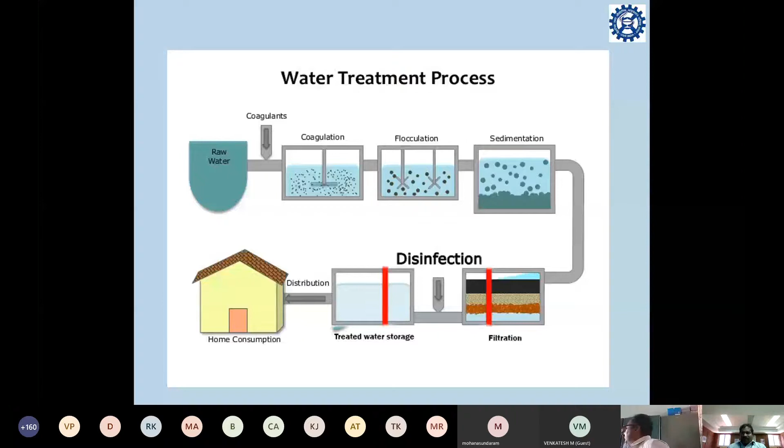So in case of water treatment processes, what are the applications of membrane based processes? I will talk about membrane in later slides, but first we have to look at the applications of membrane processes.

The first one is desalination of seawater. Seawater contains a high amount of salts, so we have to treat it for drinking purposes.

The second one is treating brackish groundwater. Groundwater also has some dissolved salts and dissolved ions in it, so we have to treat that water before drinking.

And then water softening. In some places we can see hard water, which is nothing but water that has mostly calcium and magnesium ions, so this water has to be softened before drinking.

And then wastewater recovery. In some industrial processes there is wastewater that we have to recover and convert into drinking water.

And then finally, removing color, odor, and other organic contaminants. For example, if you take dye industries, various dyes are used, so those waters also have to be treated. In all these processes, membranes play a vital role in treatment and converting into potable or drinking water.

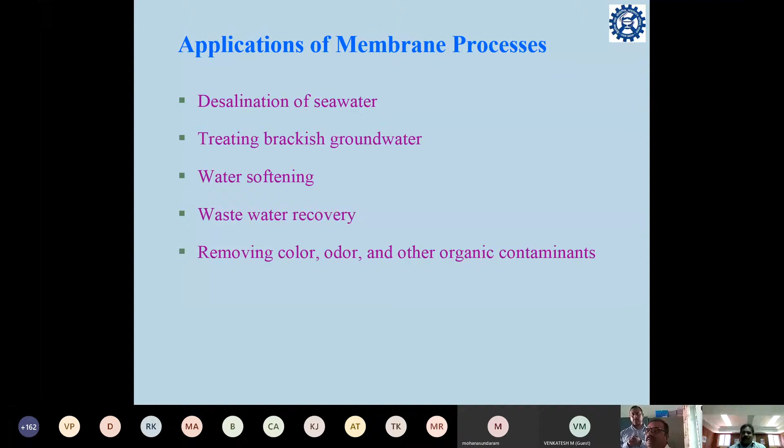So what are the advantages of membrane processes compared to other processes? We have to look at this, because there are so many processes, like coagulation and sedimentation, and we can do some chemical methods, but what are the advantages of membrane processes compared to other methods?

The first one is better removal of contaminants, since compared to other methods this membrane process can remove contaminants very well. Then higher efficiency, and third is membrane integrity assurance, meaning the membrane retains its structure even after undergoing so many treatment processes.

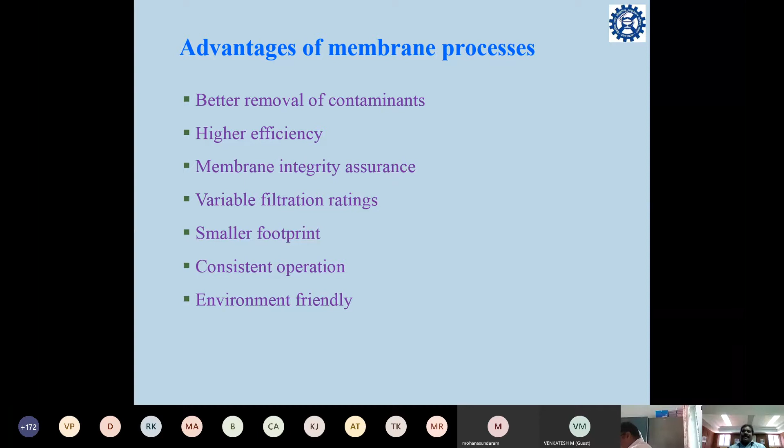Another one is consistent operation, which is also very important. And more importantly, the final one is environmentally friendly. Since membrane acts as a separator, it separates pure water from the contaminants, so we can say these membrane processes are environment friendly, because if you use chemical processes, you have to use chemical reagents, which may bring hazardness or toxicity to the water. Here, since membrane only does the separation process, it is environment friendly.

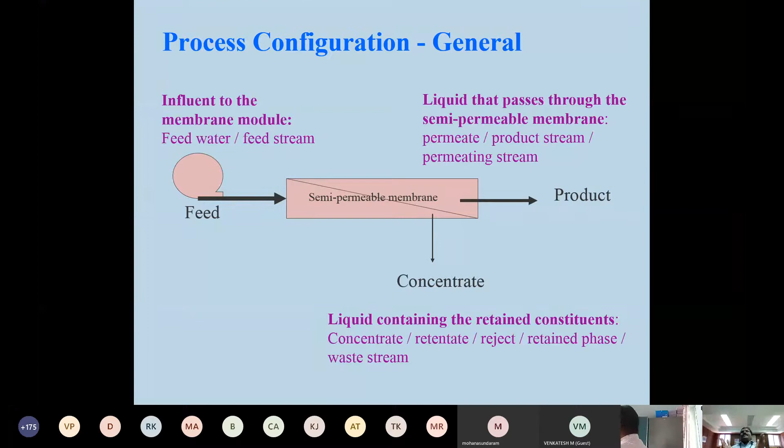Okay, when you look at the process configuration for any membrane separation process, you can see the semi-permeable membrane which is placed at the center. The feed water stream comes into the membrane, and you can see it is separated into product and the concentrate. That means the residue is retained as constituents. So we can call these retained constituents concentrate or retentate or rejects. Okay, so a basic configuration for any membrane process looks like this. So it has these 3 major steps.

Okay, so now we come to the main component here, the membrane. Since this membrane process involves a membrane, we should know what a membrane is. A semi-permeable membrane is nothing but a very thin film. It can vary from nanometer size to micron size to millimeter. So depending on the applications, we can use various thicknesses of thin film.

Okay, so the purpose of this semi-permeable membrane is that the membrane allows some types of matter to pass through while leaving others behind. So we can see here in the picture a mixture of solute particles and solvent in the feed stream, which is passed through a thin film membrane. So we can see the permeate, which contains only solvent, not the solute particles. That means only the solvent can pass through the membrane and the solute cannot.

But we can see some solute particles also in the permeate. So that depends on the membrane efficiency. So here, the main purpose of this semi-permeable membrane is to allow only specific components through it and retain others.

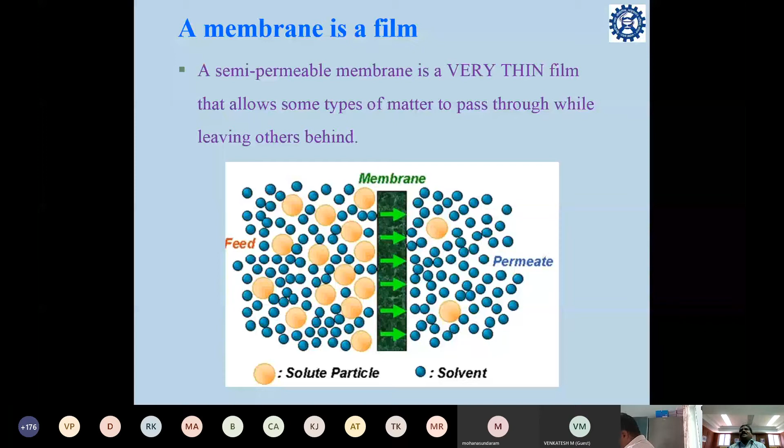So membrane types. Membrane types are also based on the different separation processes. So we can say electrodialysis membranes, microfiltration (MF) membranes, UF membranes, NF and RO membranes. Here we can see what components are transported in each membrane and what components are retained. When you look at, for example, RO, almost everything is retained. It only allows water molecules. So very small uncharged water molecules pass through the RO membranes.

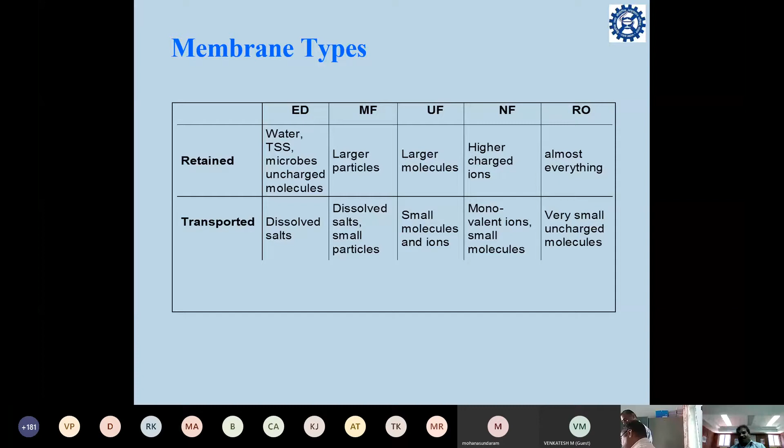Whereas if you take the other extreme, like electrodialysis, it can retain water, TSS, microbes and uncharged molecules, but it allows only dissolved salts. That means it can allow only ions.

Okay, so now we go to the membrane classification part. This membrane classification is based on materials. Based on the materials used in membranes, we can classify these membranes into two major categories. One is biological, another one is synthetic. We can take our lungs. Our lungs are themselves a cell membrane. What happens in lungs? The air is filtered, and it also purifies the blood. So here lungs act as a cell membrane.

And then if you look at the synthetic membranes, there are two major categories again. One is organic and another one is inorganic. Organic here is mainly polymeric. Polymers are macromolecules, as you know very well, which form by combining many small organic molecules together. The polymers can again be classified into glassy type polymers or rubbery type polymers.

When you take the inorganic ones, there are ceramic, glass, metallic, and zeolite. Zeolite is a kind of natural silicate which is available in nature. This also can be used as membranes.

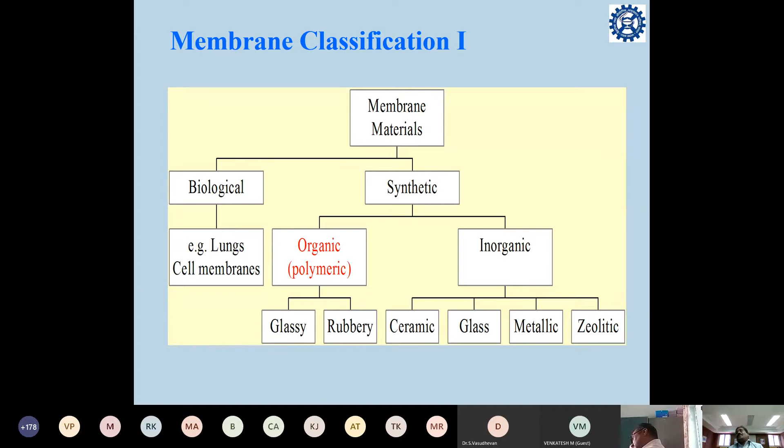The next one is the dense membrane. Dense membrane means there are no pores, it's a non-porous membrane, and the mechanism is a diffusion process. Your molecule diffuses through the membrane by means of dissolution in the membrane and then transportation. This is mostly used in gas separation and pervaporation. In gas separation, suppose you have a mixture of methane and hydrogen you want to separate using membranes. Then we use this dense membrane with functional properties that can separate the methane and hydrogen molecules.

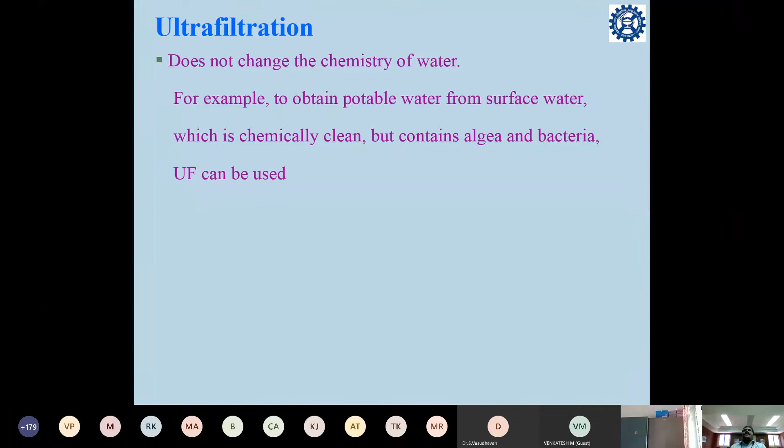It also removes turbidity while maintaining the same water quality. As I said before, the chemistry of water is not changed here. UF removes larger organics, colloids, and bacteria, while allowing most ions and small organics to permeate the porous structure. So there is also a disadvantage in ultrafiltration: it cannot remove all the ions. It allows small ions and small organics to permeate through the porous structure.

Okay, so what is the main advantage of using ultrafiltration? It can replace several conventional processes. In conventional processes, you take surface water, do pre-chlorination, then coagulant addition, then use a flocculation tank and clarification, then sand filtration, and finally post-chlorination before getting treated water. So there are many series of processes you have to use in conventional treatment.

When you use an ultrafiltration membrane, you are removing all these series of processes by using membranes which can do this filtration in a single step. That is the main advantage of the ultrafiltration membrane process.

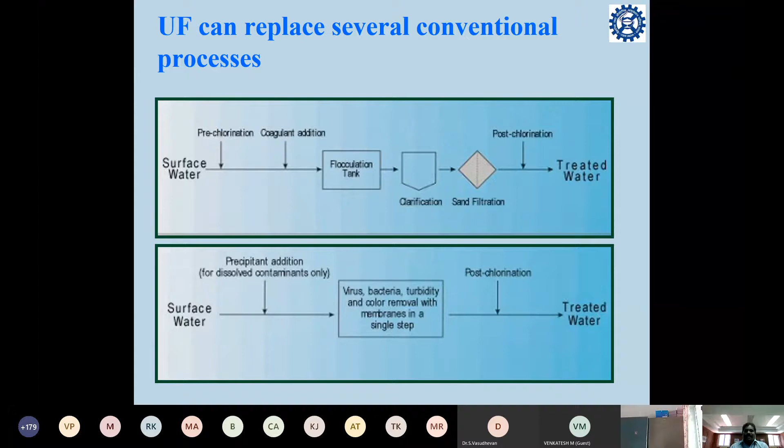This can be used as a pre-treatment process before RO, because before going to RO, the water chemistry should be suitable. That means you should not have larger particles. Otherwise membrane clogging will occur when you directly take water with larger particles to the RO system. In that case, ultrafiltration can be used before the RO process.

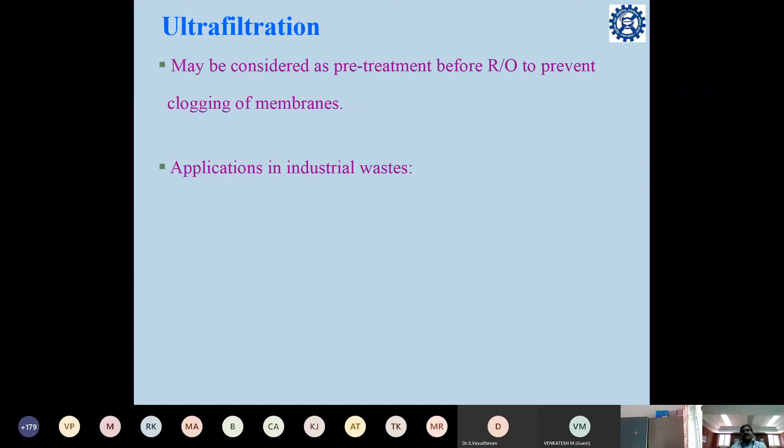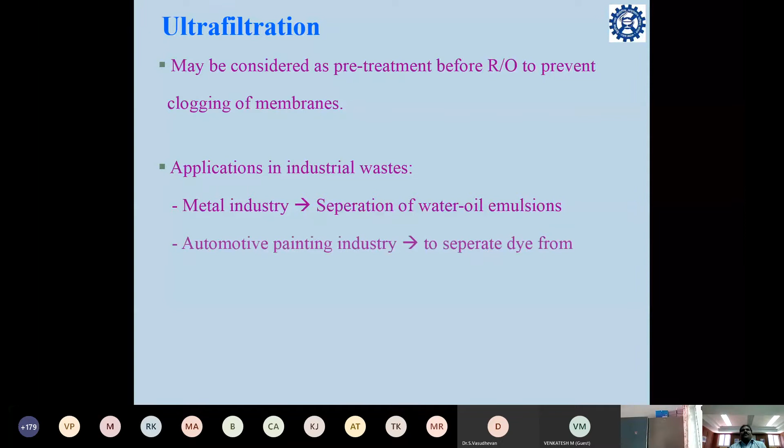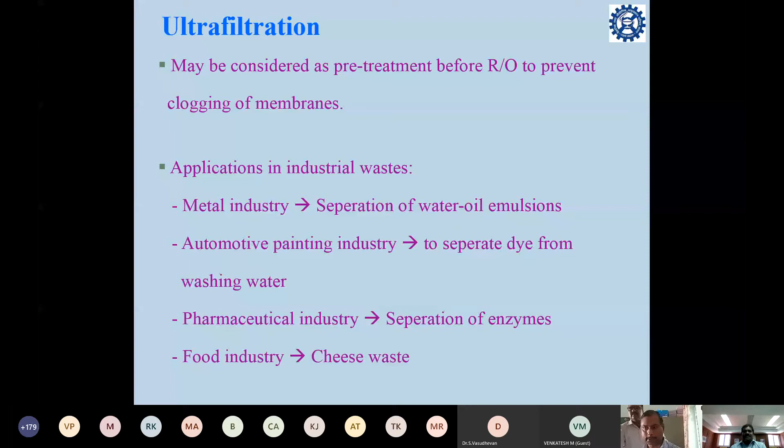It also has applications in industrial waste. What are the main applications? In the metal industry, it is used to separate water-oil emulsions. In the automotive painting industry, it is used to separate dye from washing water. In the pharmaceutical industry, it is used to separate enzymes. And in the food industry, like cheese waste, it is used to process these wastes.

Okay, the next one is another updated version of ultrafiltration: nanofiltration. Here the particles which are nano-sized are filtered. This can also have any membrane configuration. The main advantage of this method is that turbidity level is less than 1 NTU. NTU is nephelometric turbidity unit. So we can reduce the turbidity to less than 1 NTU.

Compared to microfiltration and ultrafiltration, the operating pressure of nanofiltration is high, around 50 to 200 psi. This is mainly used for softening or special applications. Mainly softening, like if you have hard water, this method can be used for softening. It is also a very economically feasible process.

Nanofiltration removes organic compounds in the range of 250 to 1000 molecular weight. That means it can remove small organic molecules. If you have some aromatic or other organic compounds in your water, they can be removed by nanofiltration. It also rejects some salts, like divalent salts such as Cu2+ and Mg2+.

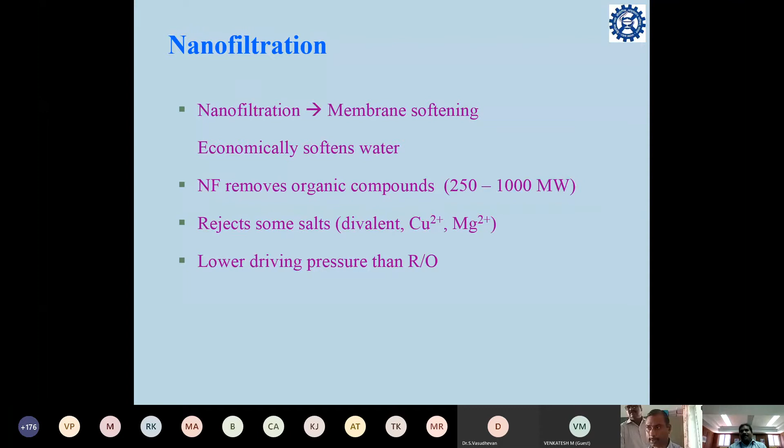So that is why I said before it is used in membrane softening process, where the removal of calcium and magnesium plays a main role. And then compared to the RO process, it has lower driving pressure. It can operate at low pressure. So that is also one advantage of this nanofiltration process over the RO process.

So the reverse osmosis process is usually used for desalination of salt water, and also in many water treatment processes the RO type membrane process is used. So here we have to apply a huge pressure to force the water molecules to move from the higher concentration to the low concentration. So this is very important.

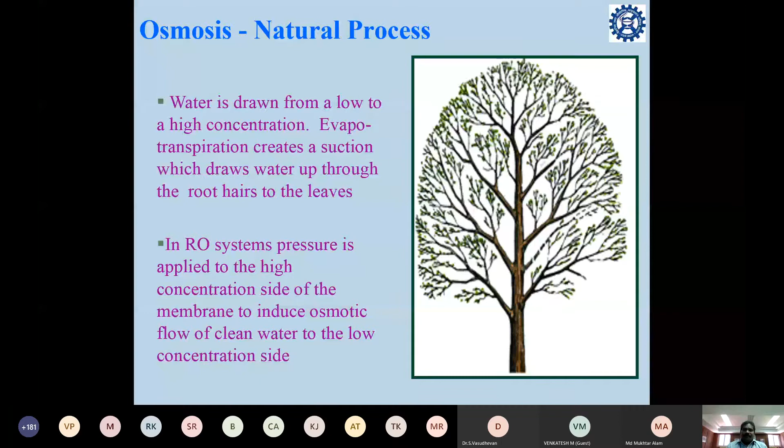So in the RO process, there are two major processes. One is the one stage process. Here we can see the elements are arranged in parallel. The feed water is fed through the coarse filter, and then it goes to the pump. The pump gives the force to force the water through the membrane.

The membranes are arranged in parallel, and from the membrane there are two major streams. One is product and another one is concentrate. The product will go downstream, and the concentrate will be recycled again to the feed system. So this is called one stage.

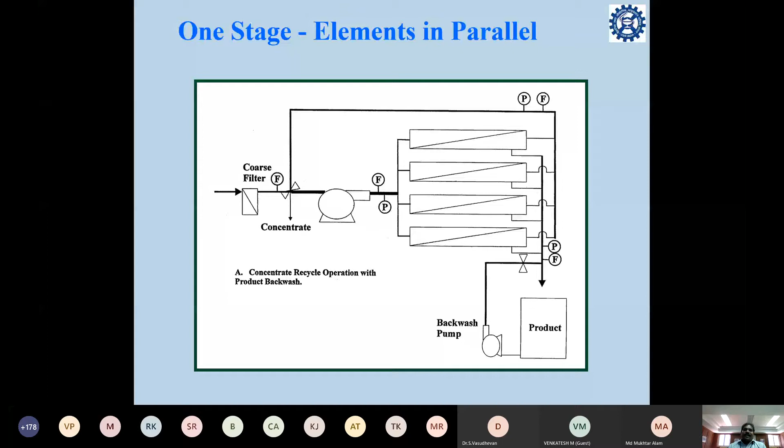And then there are two stage systems, in which we have two stages of treatment. In the first stage, there are two parallel treatment systems in which the feed water is passed through the membrane system, and the product, the permeate, is collected at the bottom. The concentrate is not recycled again to the feed system, but is separately passed through stage 2. Stage 2 has another set of membranes.

These membranes treat this water into product, and then there will be rejects. So this two-stage system is more advantageous than the single-stage system, because here we are completely separating the pure product and the reject.

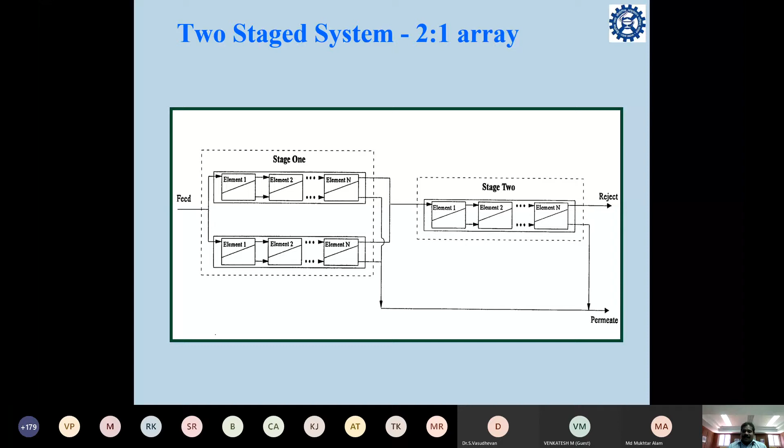Okay, so in reverse osmosis, what type of membrane configurations are used? We can use spiral wound or hollow fine fiber. As I said earlier, pre-treatment is critical to success. We cannot directly use any type of water in an RO system. Before going to the RO system, we have to treat the water by means of either microfiltration, ultrafiltration or nanofiltration. And here we can see the NTU is less than 1.

The main important thing here is the operating pressure is very high. These systems operate at high pressure, around 150 to 1000 psi. That is the main feature of the reverse osmosis process, and it can remove around 95 to 99% of total dissolved solids. So it can remove almost any dissolved solids present in the water.

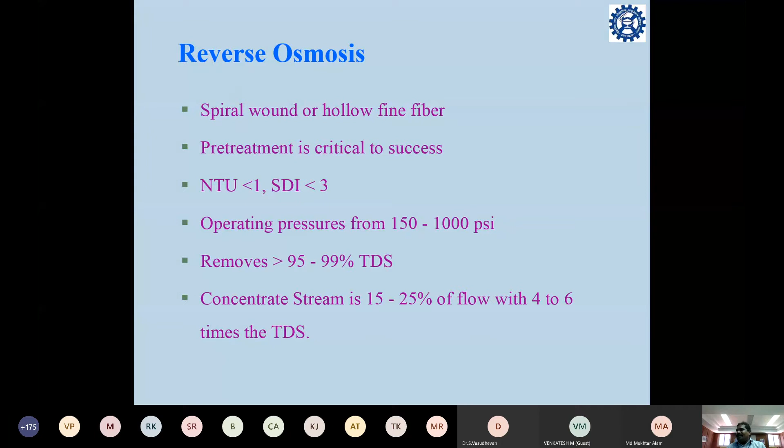Okay, so as I said earlier, the reverse osmosis process can concentrate dissolved materials from dilute solutions, and the main feature of this reverse osmosis process is that size and charge are very effective. That means you have different size and charged molecules. Let's say you have a singly charged proton, H+. This can easily pass through the membrane, because the proton has unit charge and very low size, so it can pass very easily through the membrane.

If you take large metallic ions like nickel, zinc, copper, and cadmium, these larger metallic ions cannot pass easily. So both charge as well as size matter. The third one is that lower positive charge ions can pass. Like if you have salt water, it has sodium and potassium ions, and these can pass through. But compared to protons like H+, sodium and potassium passing through the membrane is very less. That means the singly charged proton ions can pass readily.

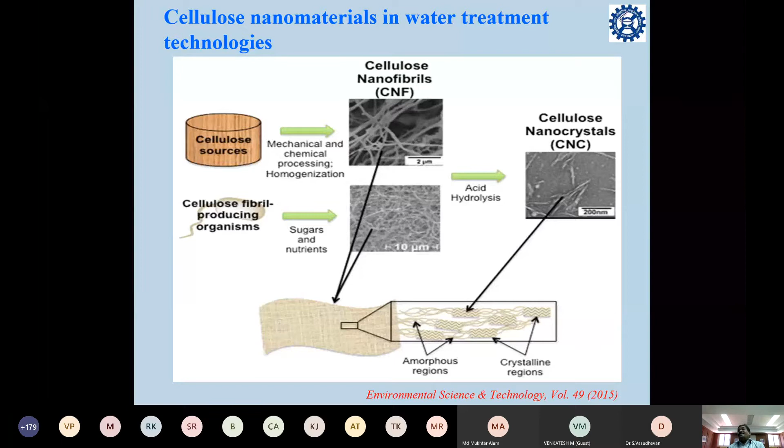And then this publication shows carbon nanotube based membranes. Carbon nanotube is a carbon version. Graphite and diamond are the natural forms of carbon, and there are recent versions of carbon like carbon nanotubes, graphene, and fullerenes. The discovery of graphene and carbon nanotubes led research into diverse applications, and these CNTs and graphenes are explored in many research applications. Likewise, here these CNTs are used in water purification.

So if you take CNT, there is single-walled CNT and multi-walled. These CNTs are like one-dimensional tubes, and they have definite pores. Through these pores, the molecules which are smaller in size can pass through this membrane. You can make these membranes a vertical type: suppose you make the carbon nanotubes vertical, pass the feed water through the top, and at the bottom the smaller molecules will come out.

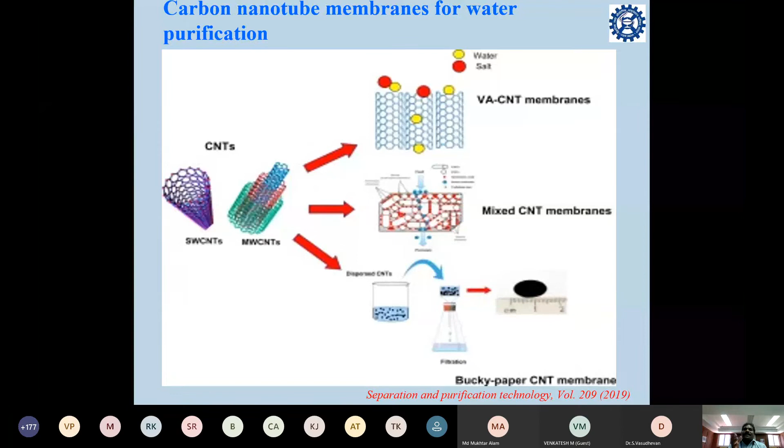And if you take mixed CNT membranes, they contain different orientations and arrangements of nanotubes. Here also, this can separate the particles from the water through this membrane by means of size. So this is one example that carbon nanotubes can be used as a membrane for water purification. And the next one is graphene oxide, as I said earlier, like carbon nanotube and graphene.

So what is the difference between carbon nanotube and graphene? Carbon nanotube is a one-dimensional tubular structure, whereas graphene is two-dimensional flat sheets. Suppose you take a carbon nanotube and cut it open with scissors, you will end up with graphene. So graphene is a flat, thin sheet of 2D layers, which comprise mostly carbon hexagons.

Here we can see this graphene-based monolayer or graphene-based layers are coated on the nanofibrous support, which is used to coat the membrane on top. The graphene is coated on the surface, and then it undergoes vacuum suction to make GO coated, that means graphene oxide coated on the nanofibrous support. Water can diffuse through the pores, since this graphene also has pores, and through these pores the water can be diffused.

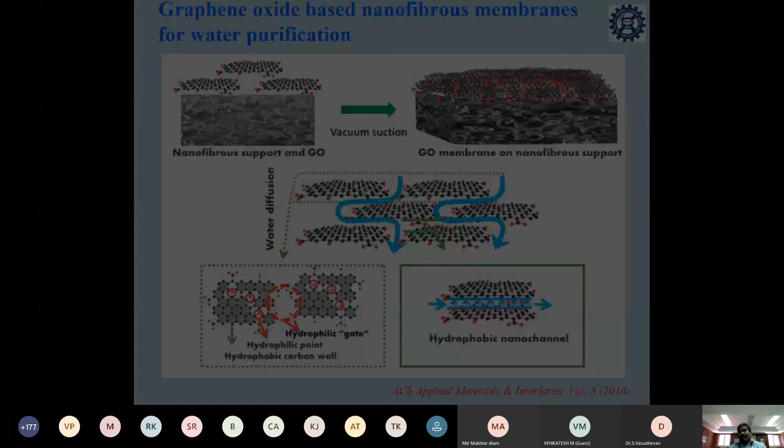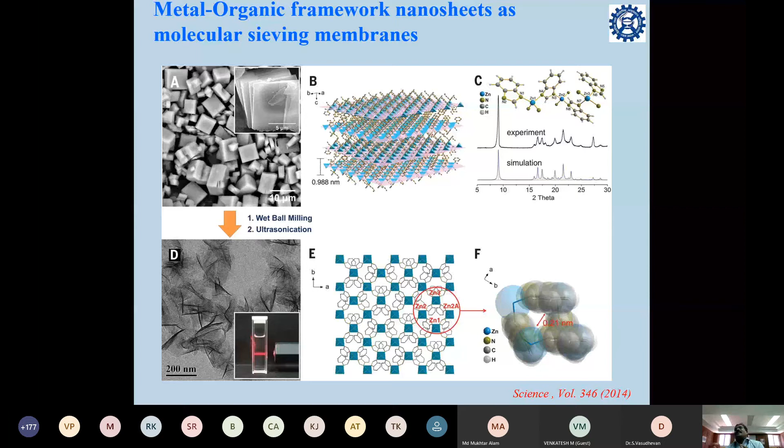We can see here one example: zinc porphyrin, where zinc is attached to porphyrin. Here we can see the pores on the right hand side, with a pore size of 0.21 nanometers. These pores can allow small organic molecules through, and it can act as a molecular sieving membrane.

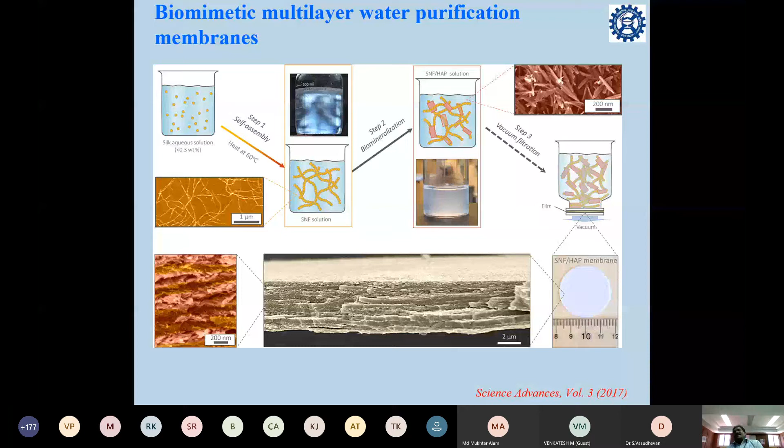The next one is different from other types of membranes - this is biomimetic membranes. Here there are some biomimetic components made into multi-layers. They take silk aqueous solution and make it into silk nanofiber, SNF solution, by heating at 60 degrees Celsius. The silk particles, individual particles, aggregate to form this silk nanofiber solution, and then they do biomineralization with hydroxyapatite, which is a phosphate mineral that is the main constituent in our bones.

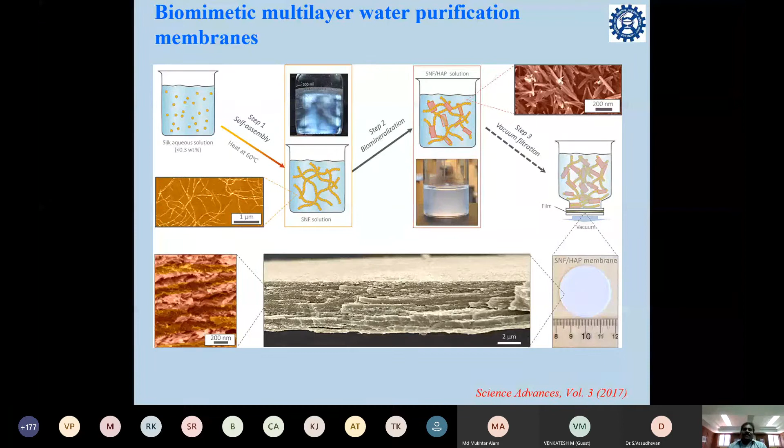This SNF is mixed with the HAP solution to make the composite of SNF and HAP, and then it is passed through the vacuum filtration setup to make a membrane. We can see the same picture at the bottom - the membrane has a multi-layer structure. This multi-layer structured membrane can be used for water purification purposes.

So far we have seen some examples of literature publications on membrane-based processes, and how membranes are developed and used in this membrane treatment process. Now we will look at the membrane configurations, like membrane designs and membrane structure.

The first one is spiral wound. Here the membranes are spiral type - two or more flat membrane sheets are rolled to make these spiral wound membranes. The next one is hollow fiber.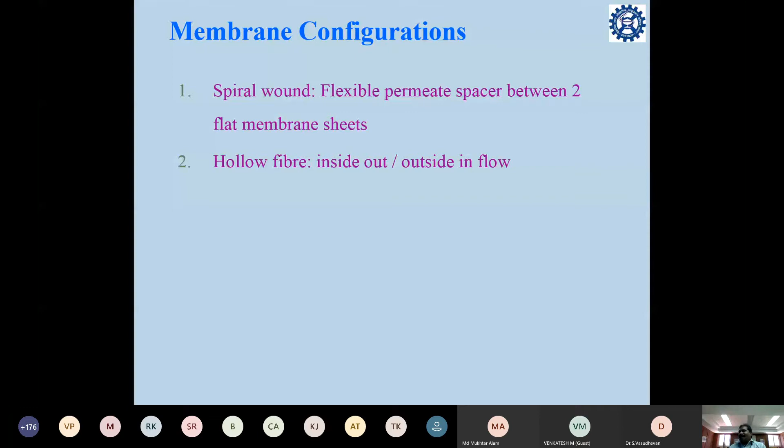Hollow fiber has a tubular structure with some definite pores, as I mentioned like carbon nanotubes - we can consider that as hollow fiber. Here the separation mechanism occurs like inside-out and outside-in flow: the water is passed through the outside, then through the walls of these tubes, and we get the pure water inside the fiber.

Tubular is also more or less the same as hollow fiber - here also there is an inside-outside configuration. Outside, feed water is passed, and from the inside the pure water comes out. The tubular configurations can be made either single or in a bundle.

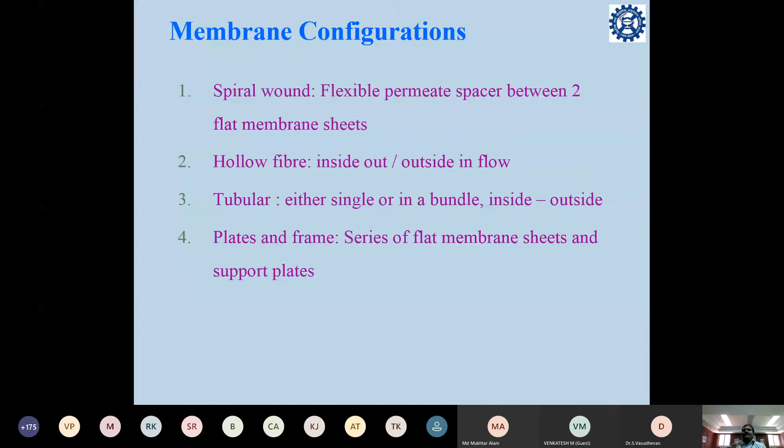Then there's plates and frame type, where a series of flat membrane sheets are stacked, assembled to make this plates and frame structure. Finally there is cartridge type, like cartridge filters - we can make these membrane materials into cartridge filters, which can be used for filtering applications.

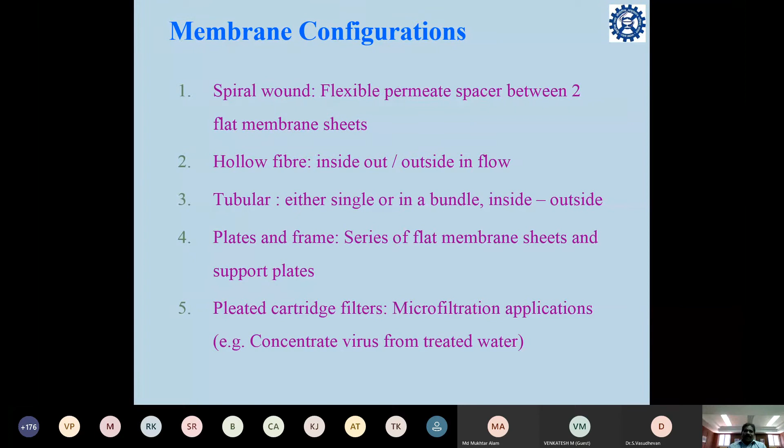This is mainly used in microfiltration applications, like concentration of virus from treated water. So we can see the structure of membranes, different types of membranes I discussed.

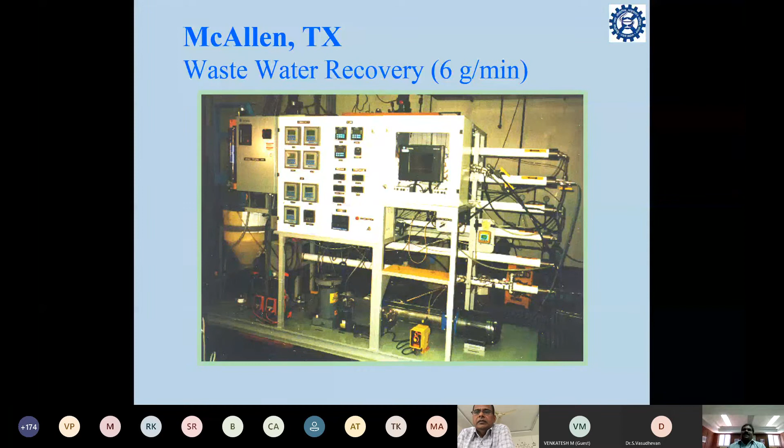These are some of the large size membrane separation units. The example shown here is a wastewater recovery plant that can recover 6 gallons per minute of water from wastewater from industries.

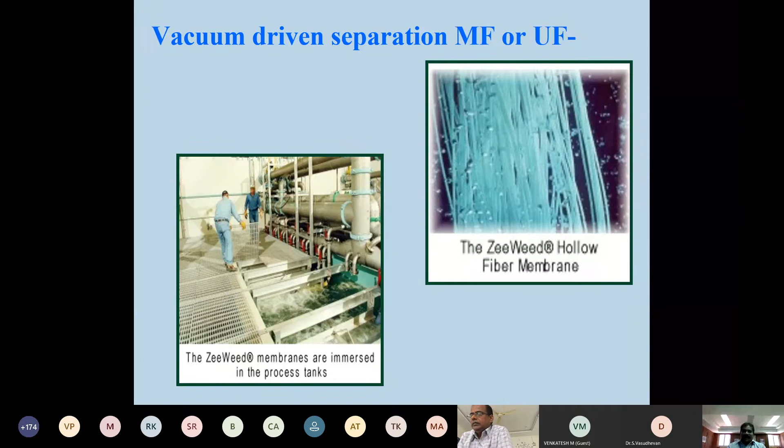There is also vacuum driven separation possible - instead of applying pressure in the microfiltration or ultrafiltration unit, you can apply vacuum on the other side. That means if you apply pressure on the high salt concentration side, then apply vacuum at the low concentration side, and through this vacuum the particles or molecules are pulled through the membrane, and separation occurs.

There are some examples of these vacuum driven separations shown here - some commercial hollow fiber modules that are used. It removes virus and bacteria, and is also used in wastewater recovery.

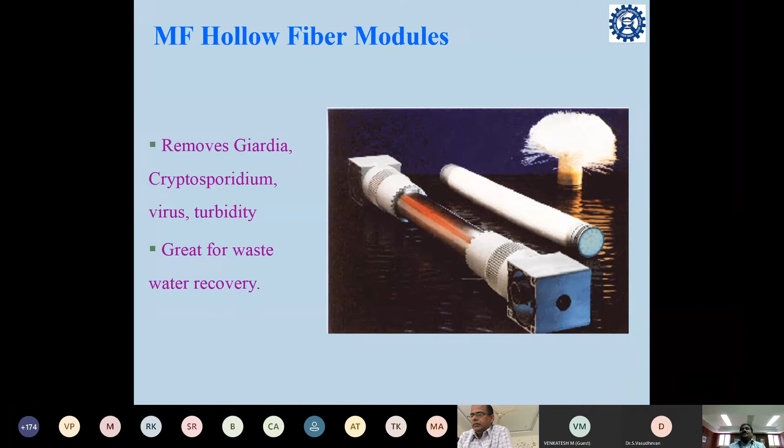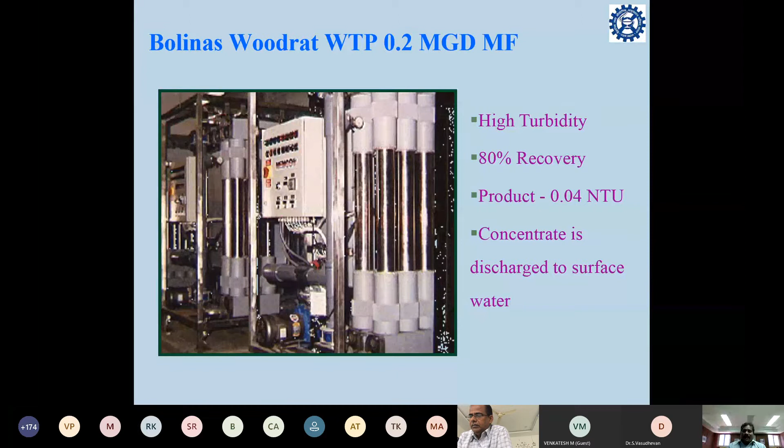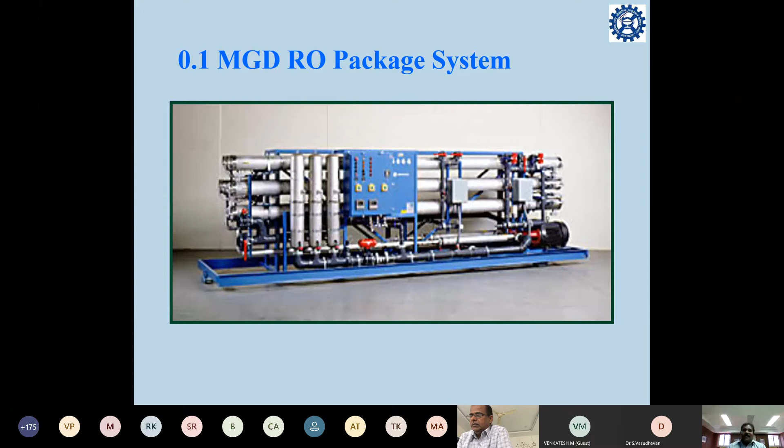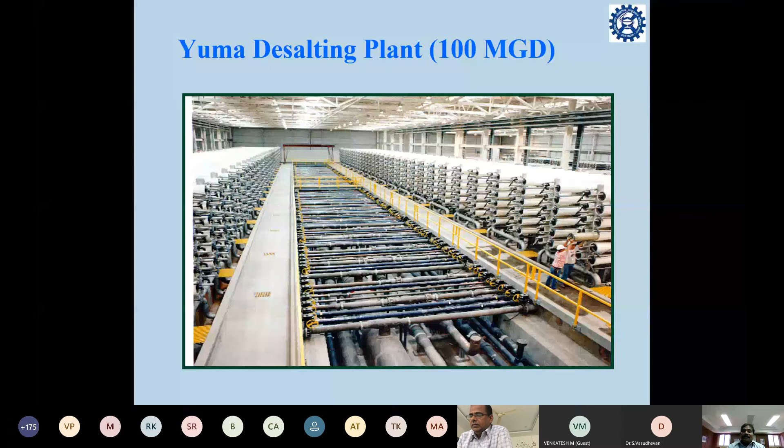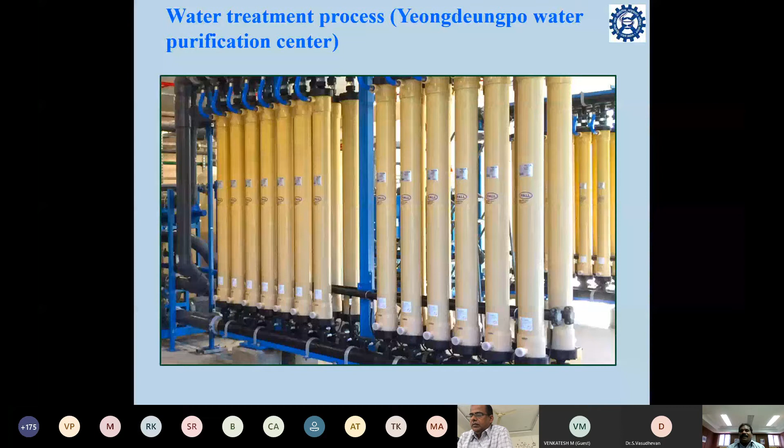This is also another big unit of water treatment process. This place is somewhere abroad, and they use this water purification center process.

Now I come to one important separation process, which is based on dialysis. As all of us know about dialysis, it is mostly used in kidney treatment in medical sectors. When the kidney cannot function efficiently to remove waste from our body, dialysis is used.

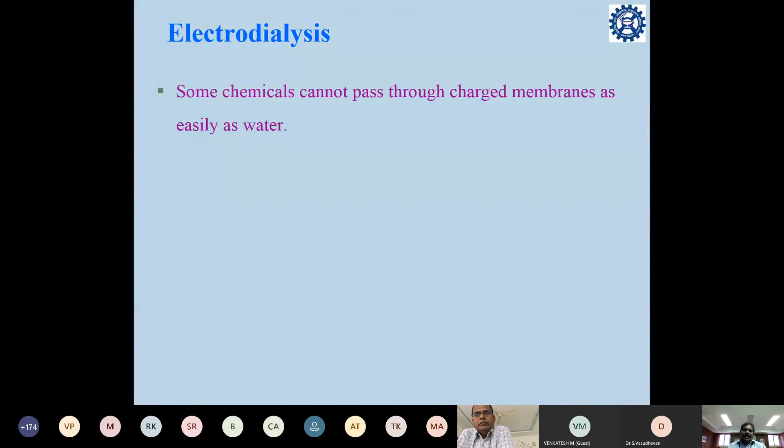In case of dialysis, if the process operates by applying electrical current, that process is called electrodialysis. Electrodialysis is a process in which you apply electric current and it separates the ions. Some chemicals cannot pass through these charged membranes as easily as water.

There is a series of positive and negatively charged ion exchange membranes arranged. These ion exchange membranes allow only charged species, not neutral molecules. When you apply direct current electricity, these positive and negative ions move through the membrane due to the applied electricity, and then these positive and negative ions separate.

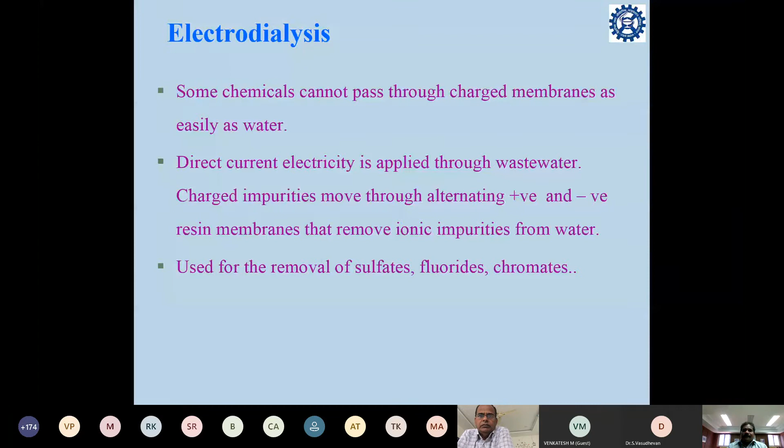To remove the fluoride, we can use this electrodialysis process. This slide shows some basic principle involved in the electrodialysis process. As we can see, at the two extremes, there are two electrodes.

One is anode and another is cathode. When you apply electric charge to these two electrodes, in between there are cation exchange transfer membranes and anion exchange transfer membranes, which are arranged alternately.

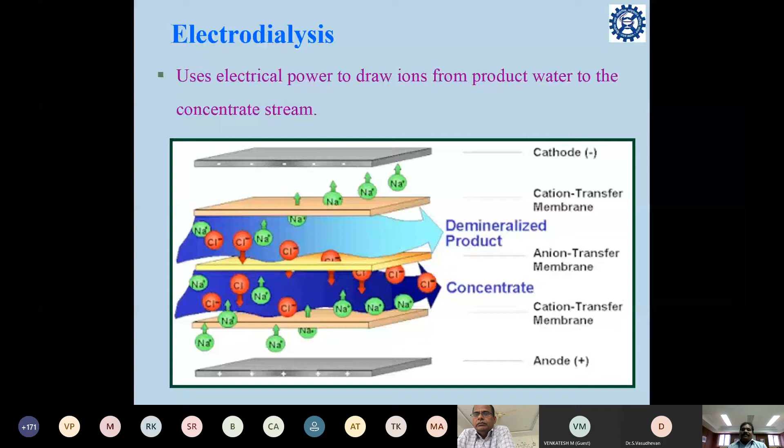Due to the applied electricity, these ions move through. If you take water or salt water, it has sodium chloride, meaning sodium positive ions and chloride negative ions. The sodium ion tends to move through the cathode, the negative charged electrode, and the chloride ion passes to the anode side. So these membranes allow these ions through based on ion exchange process. The cation exchange membrane only selectively allows the cations, whereas the anion exchange membrane allows only the anions. Like this, the ions are separated and concentrated, and finally we get pure water based on this process.

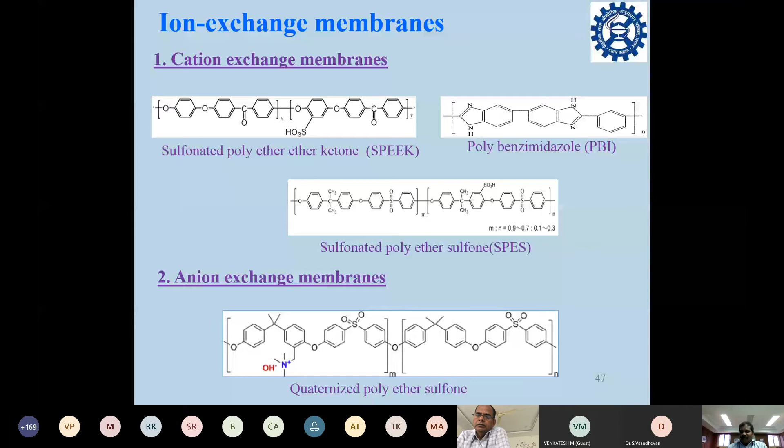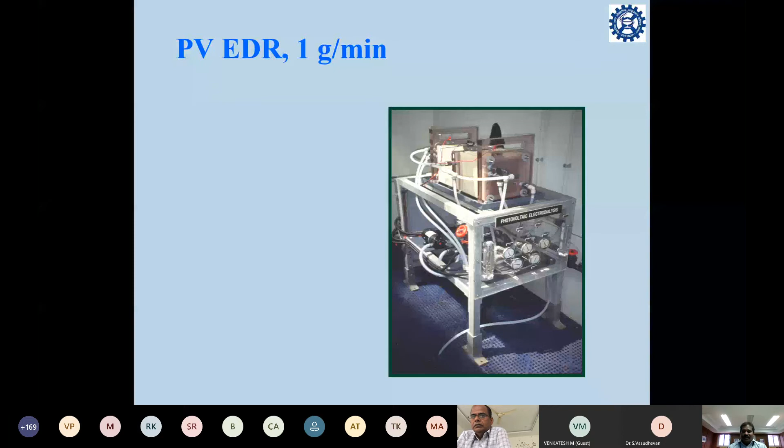This slide is very interesting. Like electrodialysis, since electrodialysis requires you to apply electrical current, there is electrical consumption. To reduce the electrical consumption due to the energy crisis, we can use photovoltaic devices - the solar panels that we use in our day-to-day life. Here, the photovoltaic converts the solar energy into electrical energy.

One more interesting thing here - in some parts of the world, there are saline wetlands, meaning the water is saline, with more dissolved salts in the water which cannot be used for agriculture purposes. In this case, they use this electrodialysis process to remove the dissolved salt ions, to remove excess salts from the groundwater, to make it fertile. This is one such example of making saline wetlands into agriculture lands, and this is followed.

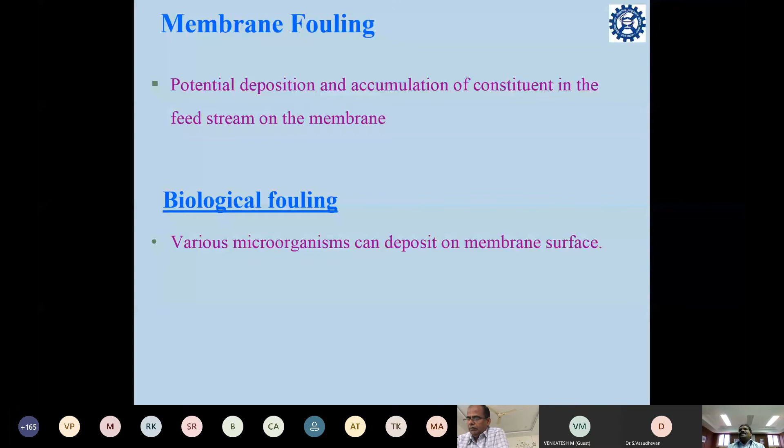And when we take biological fouling, usually these biological molecules can easily deposit on the membrane. Like if you take microorganisms like bacteria, virus, and so on, they can easily deposit on the membrane surface and make fouling. And this can be controlled by disinfection, like chlorination. If you do chlorination, this biological fouling can be controlled. You can do UV applications, like UV process. You pass UV light to treat this water to remove these biological substances. So that also we can follow.

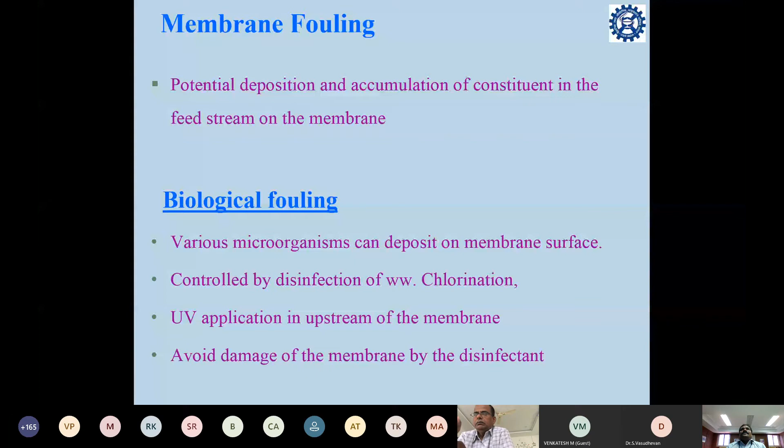Okay, so one more important and emerging area in this membrane based separation process is membrane biological reactor, MBR. This is mainly used to avoid this membrane fouling process. As I said in the earlier slide, membrane fouling mostly occurs on the membrane due to biological components. So this membrane biological reactor is designed in such a way that it has both the microfiltration membrane as well as the biomass. Here the biomass can act as a biological treatment agent.

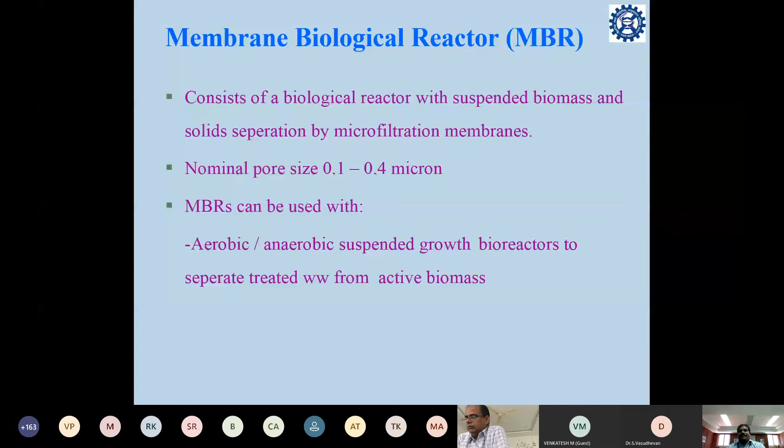So here the nominal pore size is 0.1 to 0.4 micron. Membranes are used, and then MBRs can be used with aerobic, anaerobic suspended growth bioreactors to separate treated wastewater from active biomass. So it can remove both biomass as well as the suspended particles. So this is used as supplementary solid separation in secondary clarification and also effluent filtration, and it eliminates secondary clarification and operates at higher MLSS.

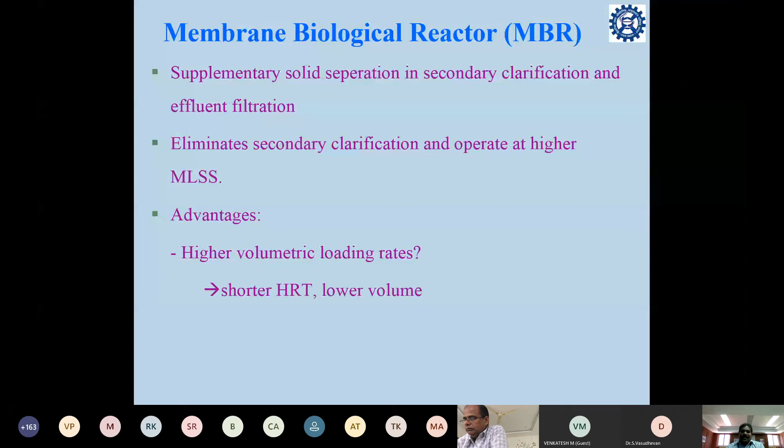So what are the main advantages here? Like higher volumetric loading rates. Since, as I told, the microfiltration, nanofiltration membranes operate at high pressures, and moreover the membrane fouling process reduces the efficiency of this membrane. Here in this process, since these biological contaminants are removed, we can use higher volumetric loading rates. So that is very important. Of course, the shorter HRT time. So there will be less sludge production. That means the concentrate will be less here.

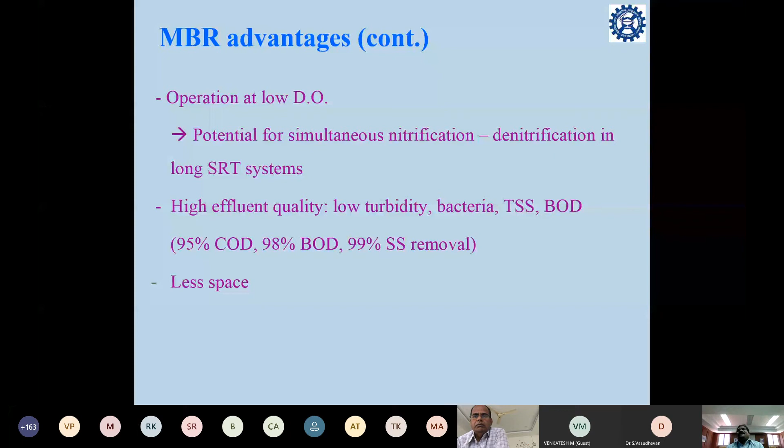And as I said before, operation at low dissolved oxygen, and potential for simultaneous nitrification, denitrification in long SRT systems, and high effluent quality, like low turbidity, low bacteria, low suspended solids and all, less space. Okay. So what are the disadvantages with these membrane biological reactor systems? The capital cost is high.

So you have to spend more construction cost for these MBR reactors, and then limited data on membrane life. So high cost of membrane replacement, energy cost. Here also there is some membrane fouling. I mean, still we cannot say there is zero membrane fouling process.

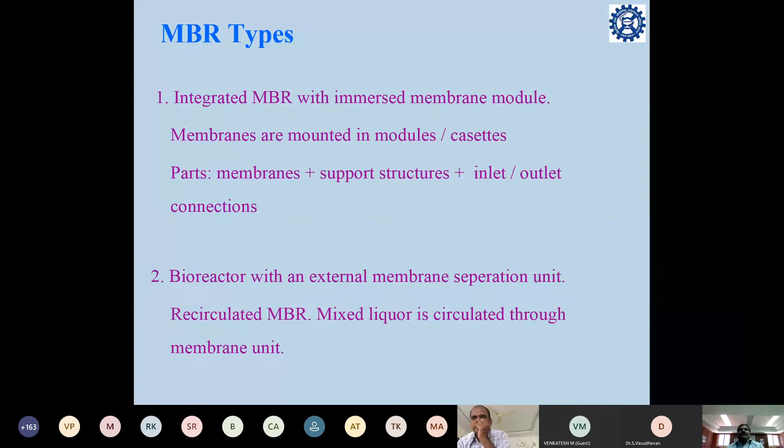And here we can see MBR, there are two types. One is integrated type. Here the membranes are mounted in cassettes, and these membranes are immersed in the membrane module. And then there is another type, bioreactor with an external membrane separation unit. And here we can see like